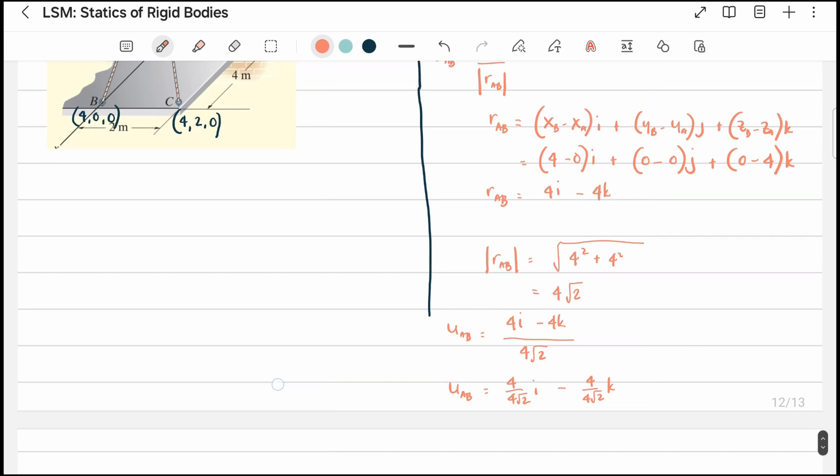So, ngayon, pumunta na tayo sa ating pagkuha ng ating force AB. Okay? So, sabi natin kanina, the force AB is equal to the magnitude of the force AB multiplied by the unit vector AB.

So, the force AB is equal to the magnitude of the force AB, which is 100 newtons, given in the problem. So, 100 newtons multiplied by the unit vector AB, kopyahin natin. At eto na nga yung ating unit vector AB. So, i-multiply natin guys and makukuha natin yung ating Cartesian form ni force AB.

And this will be equal to 70.71 I minus 70.71 K. Ayun, so nakuha na natin guys yung ating force AB in Cartesian vector form.

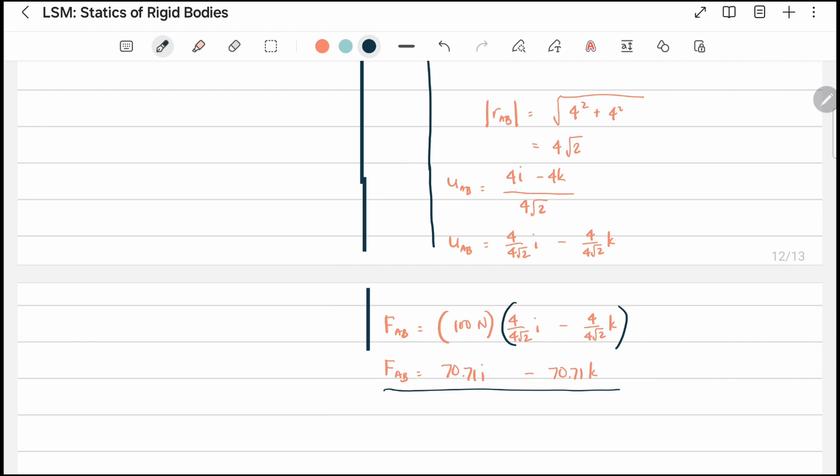Kunin naman natin si force AC, kasi kakailangan natin si force AC para sa ating resultant. So force AC naman tayo. The force AC is equal to the magnitude of the force AC multiplied by the unit vector AC. Yung ating magnitude ni force AC is given na sa problem. So yung ating kukunin nalang ngayon is yung ating unit vector AC. The unit vector AC, madali lamang itong i-compute. Gagamitin natin yung ating position vector AC divided by its magnitude.

Dito muna tayo kay position vector AC. So from point A to point C tayo. Yung ating magiging formula nito guys will be XC minus XA, then I, plus YC minus YA, then J, plus ZC minus ZA, then K.

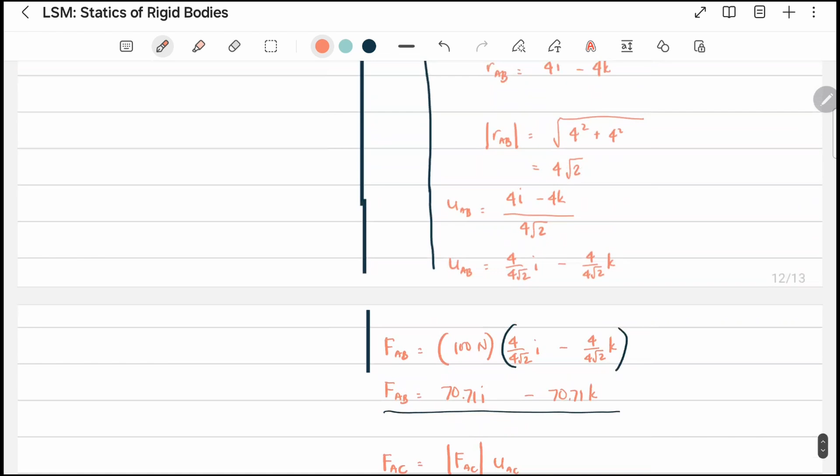Okay? So, yung ating XC minus XA muna, tingnan natin sa ating mga points. XC minus XA is 4 minus 0. Then plus, YC minus YA is 2 minus 0. Then plus, Z sub C minus Z sub A is 0 minus 4. So, our position vector AC is equal to 4I plus 2J minus 4K.

So, yun na yung ating position vector. Kunin naman natin ngayon yung magnitude ng ating position vector para makompute natin mamaya yung ating unit vector AC. This will be equal to square root of 4 squared plus 2 squared plus 4 squared. So, this is equal to 6. This is the magnitude of the position vector.

Okay, so nakuha na natin yung ating position vector at yung magnitude ng ating position vector. Makukompute na natin ngayon yung ating unit vector AC. This will be equal to 4I plus 2J minus 4K divided by 6.00. So, the unit vector AC is equal to 4 over 6 I plus 2 over 6 J minus 4 over 6 K. Ito na yung ating unit vector AC, magagamit natin sa pag-compute ng Cartesian vector form ng ating force AC.

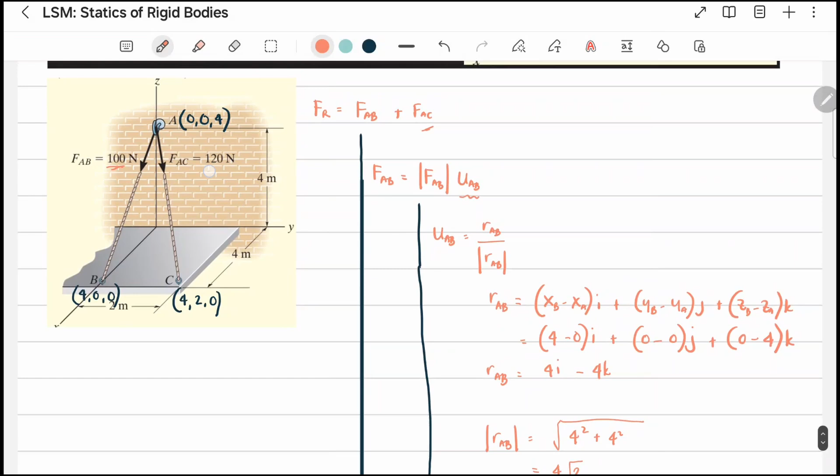Yung ating formula para sa force AC is equal to the magnitude ni force AC multiplied by the unit vector. So sagutin natin to guys. The force AC is equal to the magnitude ni force AC, which is 120 newtons, multiplied by the unit vector AC. Ito na yung ating unit vector AC. Ngayon, i-multiply na natin para makuha natin yung Cartesian vector form ni force AC.

This will be equal to 80 I plus 40 J minus 80 K. So again, ito na yung ating force AC in Cartesian vector form. At ang ating units dito guys ay naka-newtons. Ganun din yung force AB kanina, naka-newtons.

Ngayon, ang hinahanap natin guys dito is the resultant. Yung ating resultant ay force AB plus force AC. Ito na yung ating formula, ito lang yung gagamitin natin para ma-solve yung problem. So, the force resultant is equal to the force AB. Kopyahin natin guys yung ating force AB.

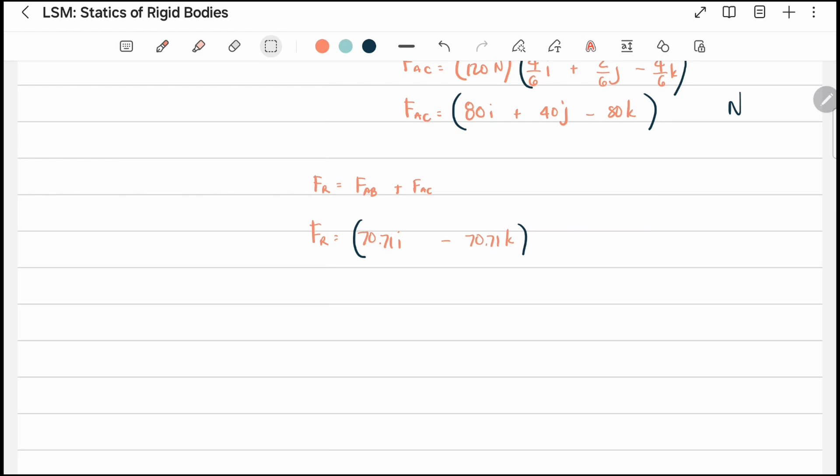Yung ating force AB ay 70.71 I minus 70.71 K. Then plus the force AC. Kopyahin natin yung force AC, which is 80I plus 40J minus 80K. Ang gagawin natin guys is i-add lamang natin para makuha yung ating resultant.

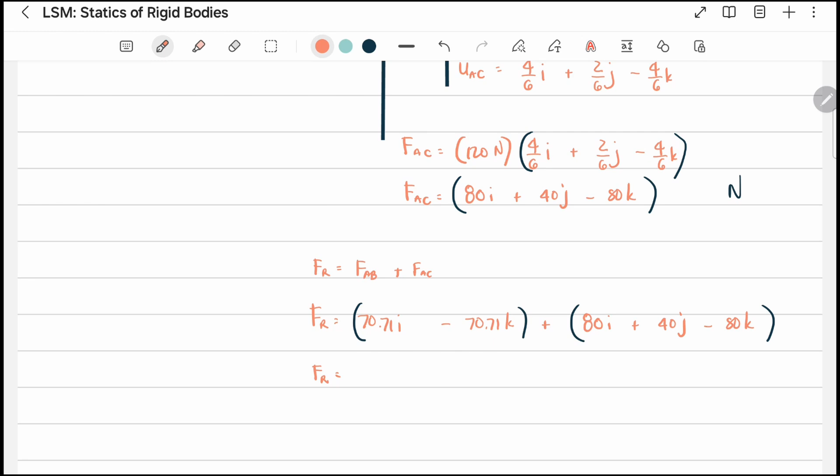Pagsamahin natin yung parehong I. That will be 150.71I. Then plus yung J, that will be 40J, and then yung K, that is minus 150.71K. So ang tinatanong dito is the resultant force ng ating mga cable. Ito na yung ating resultant.

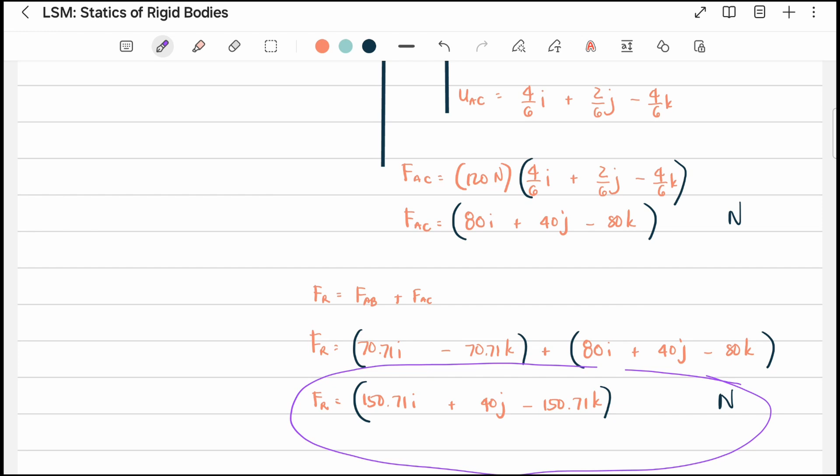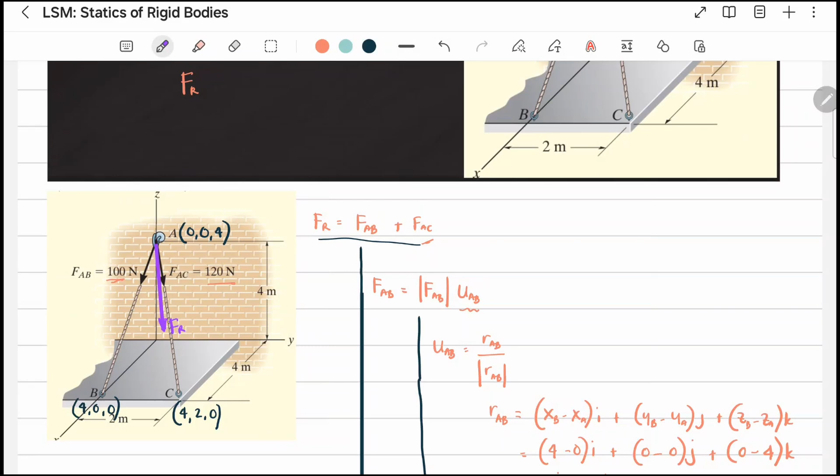So again guys, nakuha na natin yung resultant force na tinatanong sa problem, in Cartesian vector form. I hope naintindihan nyo guys yung ating topic. That was force vector directed along a line.